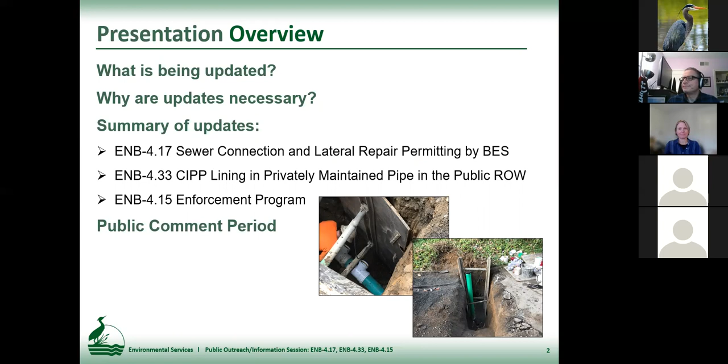So what is being updated? We're updating 3 existing administrative rules under the authority of BES. The first rule is what we refer to as ENB-4.17, regarding sewer connections and lateral repairs permitting by BES. These are policies and guidance for new sewer connections and repairs to existing sewer laterals in the public right-of-way. We're going to be talking about updates to Administrative Rule ENB-4.33, which is the use of cured-in-place piping, lining repairs in privately maintained pipe in the public right-of-way. This rule provides guidance and policies specific to CIPP repairs of private lines and laterals in the public right-of-way. And then we're going to touch on some targeted updates to ENB-4.15, which is our enforcement program rules.

Just a quick heads up that we're not talking about updates to city code. Where code provides the regulatory authority to do something, authorized by the city charter, we're talking about administrative rules here, which are intended to provide guidance, details, and decision-making criteria to facilitate the implementation of code. So as it relates to code, the rules we're going to talk about today, the authority comes from what we call City Code Chapter 1732, our public utilities code.

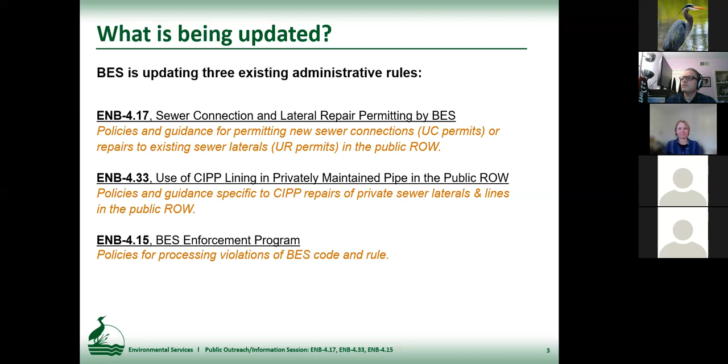So why are updates necessary? ENB-4.17 has been adopted and in place for several years, but it hasn't seen any major updates. So the updates will focus on removing obsolete information, updating references to applicable city design and construction standards, and overall clarifying policies and protocols regarding reviewing, issuing, and approving connection and repair permits, or UCUR permits.

ENB-4.33: these updates are primarily driven by the need to establish standards that will allow BES to consider CIPP products as alternatives to end seals. Just to be clear, we're not removing the requirement for end seals. They are still required, but the rule does need an update to allow BES to consider alternatives to end seals. Since the rule is being updated anyway, we're going to use this opportunity to provide clarity and guidance regarding the CIPP lining permit process and protocols.

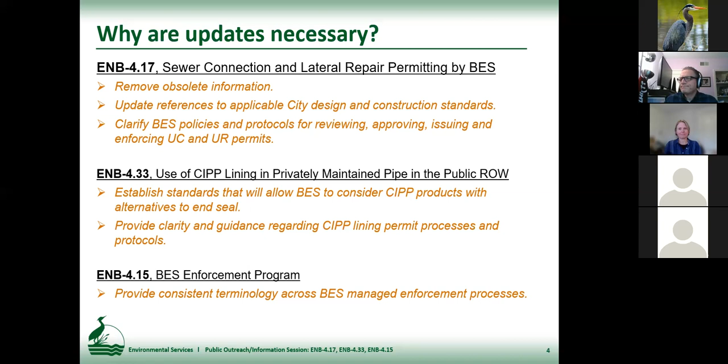And lastly, the enforcement program rules, ENB-4.15, just some targeted updates to provide consistent terminology to align the rule with some of the enforcement tools that BES's enforcement program uses. There's not a comprehensive update, it's more just targeted updates.

So to kick things off, we're going to summarize updates to ENB 4.17. Before we get going, I think it's important to note what's not changing. These updates do not add or create any new city policy, and the rules do not require permits for activities that are not already subject to this rule. So having said that, if you're familiar with the rule, when you look at the updated version, it's going to look and feel very different compared to the existing rule, but that's largely due to a comprehensive reorganization, which we're going to speak to later in the presentation.

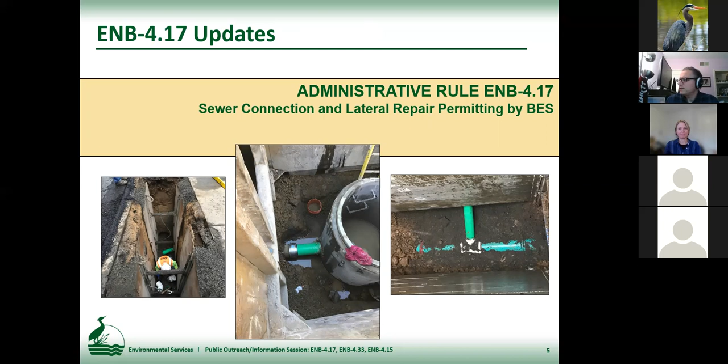So what is ENB 4.17? This is an existing administrative rule that provides policies, protocols, and guidance for permitting sewer connections and laterals in the public right-of-way. You can think of this as a mini manual specific to connecting and repairing laterals to the public sewer system. The permits associated with this rule include lateral connections, known as UC permits, and lateral repair permits, which we're calling UR permits. Just to be clear, this rule does not relate to public works permits, which involve much more complex activities such as public sewer main extensions and stormwater facilities. These are specifically rules that talk about lateral connections in the public right-of-way.

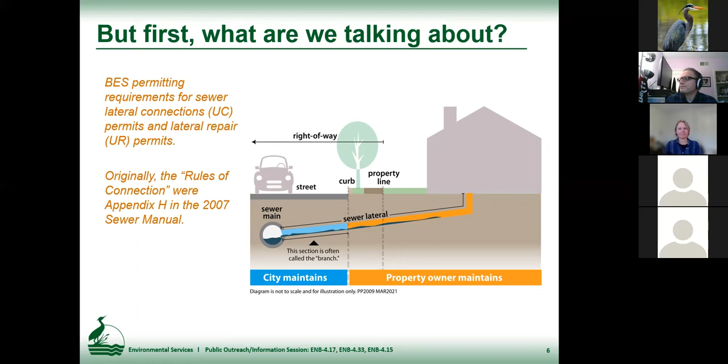Getting into 4.17, the overall theme of the update is to improve the rule's usability, transparency, and predictability. If you're familiar with the rule, it can be challenging to find information because all the information really is embedded in one of two long bulleted lists that don't follow any sequential ordering. So the updates address this by grouping related policies and listing them in chronological order that generally follows the overall construction and permitting processes.

One standout thing is the rule now includes a table of contents so you can find what you're looking for and hopefully find answers quickly to questions like, what type of activities trigger a UR permit versus a UC permit?

What kind of submittal requirements or qualifications are expected from the sewer contractor and such. Rule updates also remove a lot of outdated policy, which includes removing work that was never really permitted under or intended to be permitted under this rule, such as sewer extensions, work on private property which is subject to plumbing code, and decommissioning of septic, which is permitted by BDS and also requires some level of DEQ. Lastly, we're updating references to current city design and construction standards, such as the sewer drainage facilities design manual and the standard construction specifications.

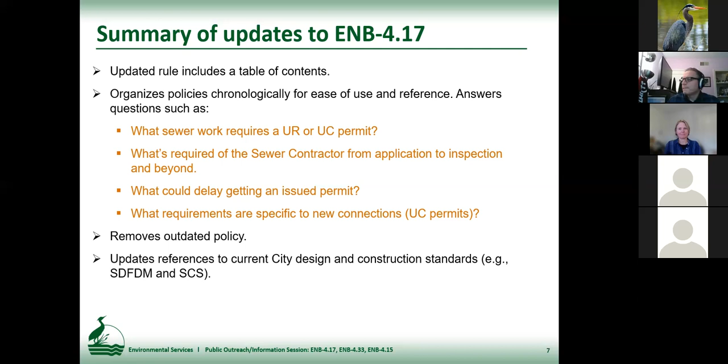The rule provides updates and clarification regarding activities and locations that are subject to UC and UR permits. So here's some examples of what activities trigger a utility connection permit.

We're connecting to a public sewer, connecting to an existing public branch, so that's one that takes it to the curb. The UC permit might involve just connecting the private side to the public side, this little segment here. Or if there isn't an existing branch, it would take it from the property line all the way to the public main.

UC permits are also issued to install cleanouts, City wyes. If you're relocating a line, they're issued for abandoning and capping laterals and installation of standard manholes.

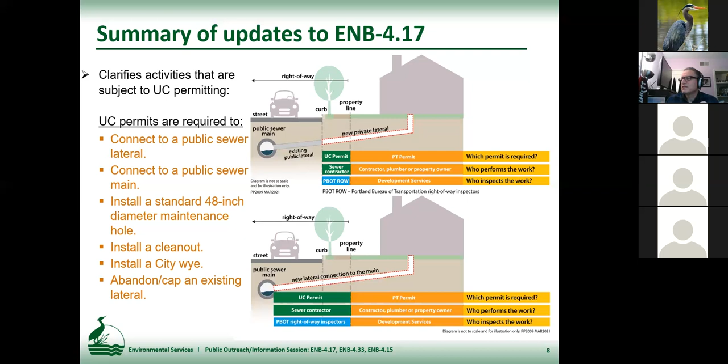Margaret, is there anything you want to add? Lynn, you did a fabulous job. Perfect. All right, cool, thanks.

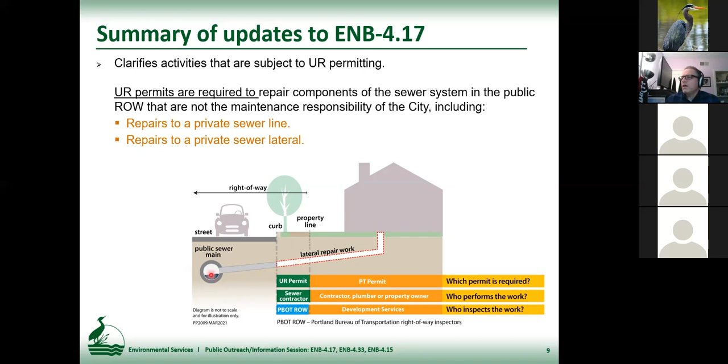I should back up one slide. What we're talking about here is the privately maintained portion of the public right of way. This is the area that's still within the right of way, but it's not the responsibility of the city, it's the responsibility of the property owner. Determining that can be difficult at times depending on the site conditions. So what the rule does is provide some guidelines to help determine those areas.

The city's maintenance area is described in chapter 17.32. We're not changing or altering any of the maintenance responsibilities reflected in code, we're just providing guidance on determining that privately maintained portion of the right of way.

To summarize, for paved roadways, which also includes alleys, we're talking about the face or edge of pavement to the property line. If there's more than one curb, like a public stormwater facility, then it's the face of curb that's closest to the property line. Unpaved streets, including unpaved alleys, this is the area from the property line to the edge of the 28-foot wide city maintenance area, centered in the public right of way. And for public sewer easements, we're talking about the area from the Y or T connection at the public sewer main to the edge of the public sewer easement.

I think I got that, but Mark, I just want to ask one more time, is there anything you want to add? Because this was a pretty good update here. Glenn, I have nothing to add. All right, then we'll move on.

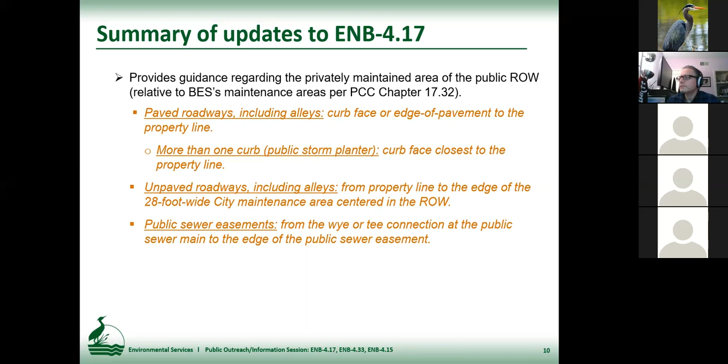The UCR permitting team really does strive to issue permits same day, but there are going to be situations or conditions that may cause a delay or withholding of the permit. That's not super clear in the rule, so the rule update is providing clarity and outlining some situations where BES may require a BOTMO.

Oh my gosh, Margaret, the Bureau of Maintenance? Bureau of Maintenance, Environmental Services Division of Maintenance Operations. Of PBOT.

You pick the acronym and we may require them to do the connection. Some of the situations include if it involves a clay pipe 15 inches or larger in diameter, mains that are 36 inches in diameter or larger, or brick mains. That could be a situation where we're going to request PBOT to do the connection.

And also the updates provide examples of conditions that may impact same day issuance. So if the sewer contractor is proposing a deep riser connection or inside drop, those can delay it because it might require the permitting team to check in with other teams, or in the case of an angled lateral, that might be subject to a design variance. Something that may withhold the permit for a while is resolving non-conforming sewer issues. So the rule updates just clarify existing expectations, since I don't think it was clear that permits would be issued same day. We're just making it clear that with some of these situations, you can expect it to take maybe a little longer, maybe not.

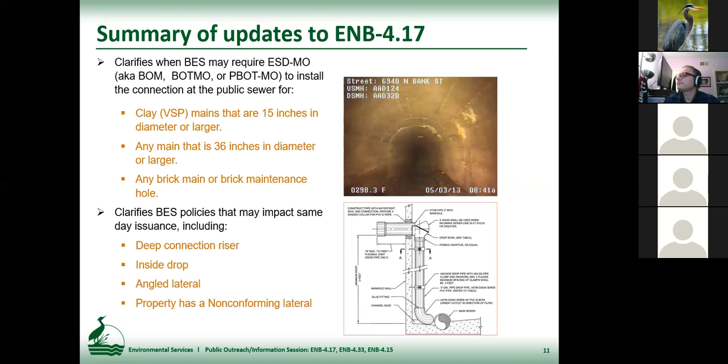The rule updates what is currently table 2 in the existing rule. It actually puts the information in the existing rule into a table format. It doesn't even have a format currently, it's just a bunch of information. It makes it really challenging to read and interpret, so we've cleaned that up.

The table now is just to clarify lateral to main connection types. This table really just expands and clarifies a similar table in the sewer design manual. That's all there is to say about that.

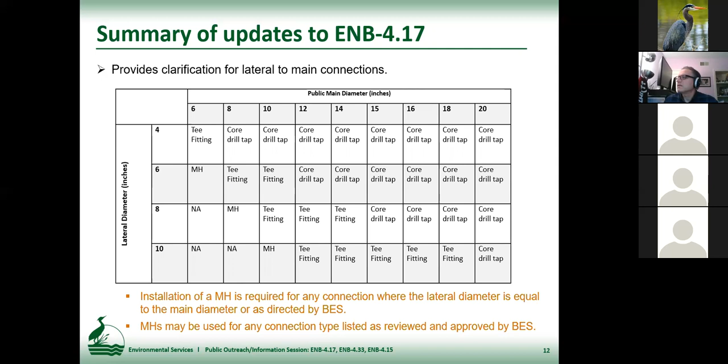The updated rule provides guidance on what to do when relocating and abandoning sewer lines. For private sewer laterals, you're going to be required to put in watertight plugs or caps on the face of curb—that's for sewer laterals on private sewer lines. Plugs and caps are going to be installed on the upstream and downstream ends of the private line.

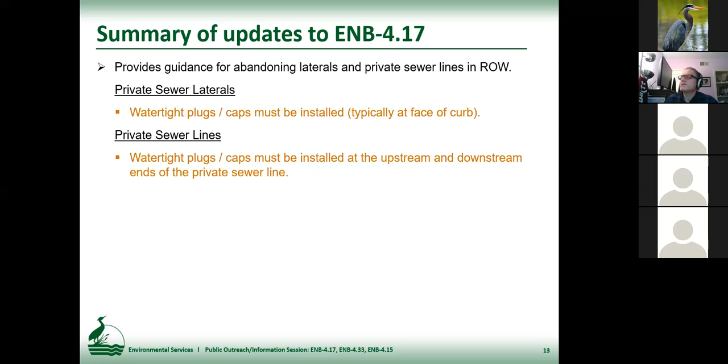So this guidance is new to the rule, but it reflects existing code requirements and construction standards and practices. It was added to the rule to provide clarity.

ENB-4.17 now includes a typical detail for installing storm and sanitary connections, and the intent of having this in the rule is really just to facilitate on-site conversations between the contractor and the inspectors. A picture says 1,000 words, and it's easier to point to a picture and describe what's going on than trying to describe it based on a condition in the rule.

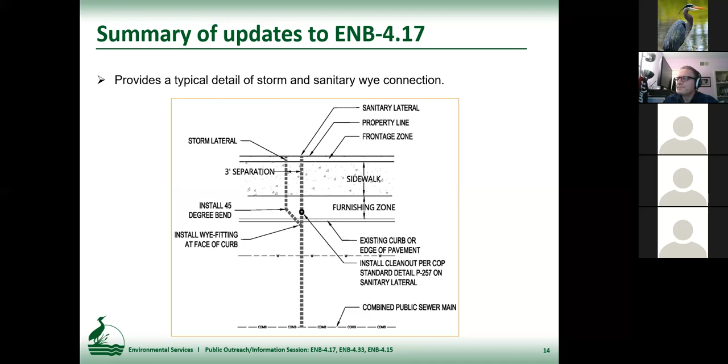And lastly, the rule updates make it clear that UC and UR permitting are subject to enforcement. This is not new—enforcement of UC and UR permits is and has always been authorized under Chapter 17.32 of City Code. It's just that the rule improves transparency regarding the types of actions that may cause enforcement, and those enforcements are conducted through our environmental compliance division.

And there's another rule we're going to be talking about later in the presentation that describes the procedures for enforcement, and that's ENB-4.15. Some examples of violations that might occur: failing to get a permit, failing to comply with the description of work—so going above and beyond what was authorized in the permit—not meeting conditions of the permit, and so forth. So with that, I'm going to switch gears now, and we're going to talk about our CIPP rule, which is Administrative Rule ENB-4.33.

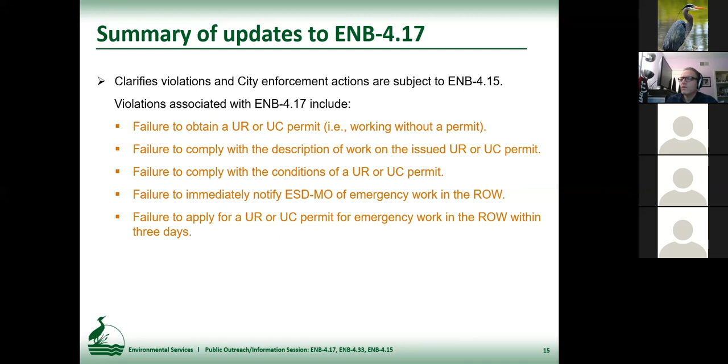ENB-4.33 is our cured in place pipe lining repairs for a privately maintained pipe in the public right of way, which might be the longest title of any admin rule we're going to talk about.

So before we get into it, like the previous rule we talked about, ENB-4.17, if you're familiar with rule 4.33, you'll notice that the look and feel of the rule is quite different than the existing one. That's largely due to just a comprehensive reorganization, trying to group related policies and put it in a sequential, logical order that makes sense for staff and for customers.

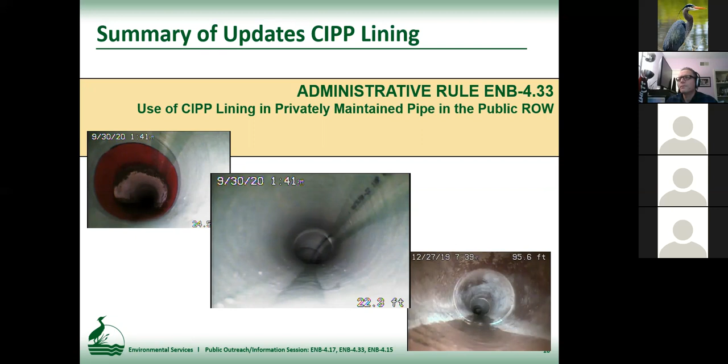So let's get to it here. I know I'm probably preaching to the choir, but for anyone not familiar with cured in place pipe lining repairs, this is a repair method that involves inserting a flexible liner into the existing failing pipe, or host pipe as we'll call it, and curing the liner to create a rigid, smooth surface that restores the old pipe to an almost new condition.

Administrative Rule ENB-4.33 provides the criteria, guidance, and protocols for using CIPP lining to repair privately maintained pipe in the public right of way.

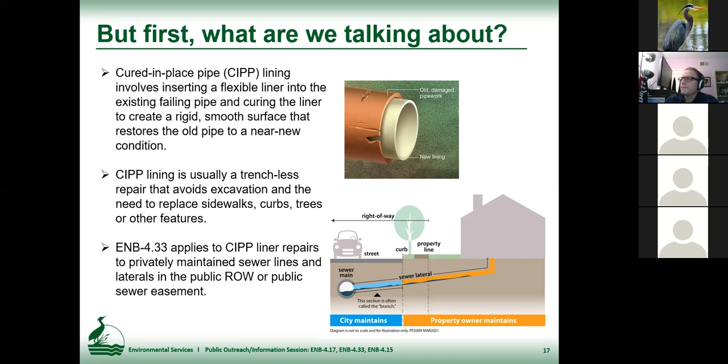This is the primary driver for the updates. I'll start by saying it's not the intent of the city to preclude the use of viable, effective, or equivalent materials. However, staff implementing this rule found the existing language for end seal requirements too restrictive, and that it didn't allow BES to consider equivalent alternatives. So that's the primary driver for this update, to reconcile an inequity regarding CIPP end seal requirements.

To address this, the updated rule now includes criteria that BES will use to review products that do not have or require end seals, basically alternatives to the end seal. Within the rule you'll find submittal requirements. It's suggested you provide as much information as you can, including methods of the liner system to expand and tightly conform to the host pipe, means and methods for product curing, and data for shrinkage and annular space development. That information has to demonstrate that the lining system can withstand an external hydrostatic pressure of 7.25 psi.

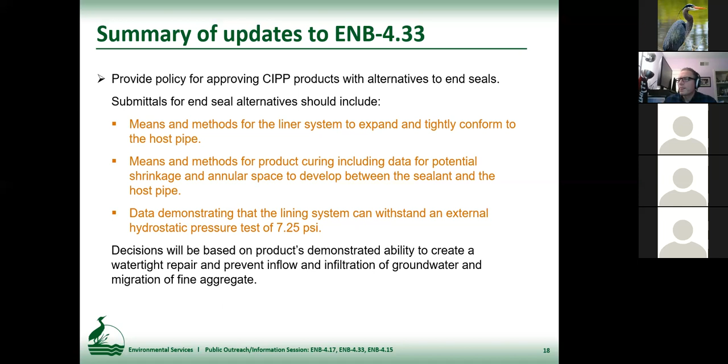That was driving the updates, to add this policy into it. Since the rule was open and being updated, we took the opportunity to clean it up, making it more user-friendly for customers and staff. That was accomplished by simplifying language to be more concise. There was a lot of redundancy in the rule, so we've done our best to remove that. We've also consolidated policies and guidance under related subject matter, since it was difficult to follow in the current rule.

Similar to 4.17, we organized this rule in a logical, chronological order that follows the construction and permitting processes, so you'll see parallels between the two rules and how they work together.

So this is in that same vein of clarifying, since the existing rule can be difficult to navigate and is often unclear as to what needs to be done, who is responsible for looking at it, and to what standards. We've tried to do that.

Basically, this rule is implemented by two different teams: BES standards and practices, and BES UC/UR permitting. They have different responsibilities, and the current rule isn't always clear as to who's doing what and when. So this rule has divided those responsibilities out.

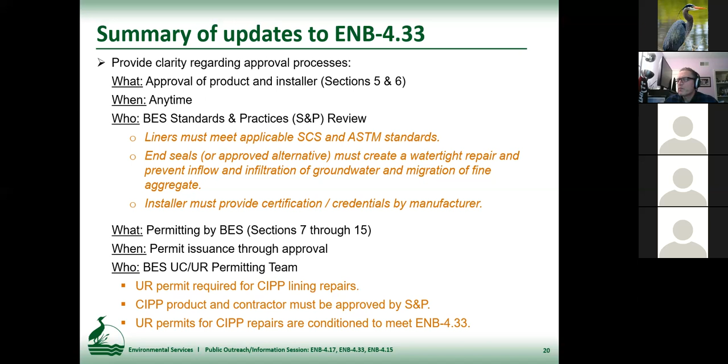Again, nothing really new here. The rule changes strive to provide clarity and predictability through better organization and more direct, less ambiguous language, and again remove redundancy. We've tried to organize the rule to lump all the related policies, so everything related to video requirements is section 10, liner locate is section 11, and so on.

It talks about after construction, these are the documents that you need to provide to Margaret's UC/UR permitting team, and then how they're going to look at that information and ultimately approve that UR permit. That's going to wrap up ENB-4.33. If you have questions, we'll address them at the end of the presentation, we'll have plenty of time to do that.

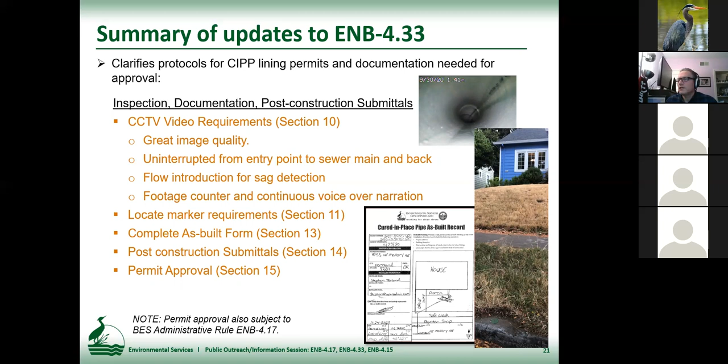The last rule we're going to talk about today is our enforcement rules, our administrative rules for our enforcement program. The primary driver for this update was to correct a minor oversight that inadvertently excluded ENB-4.17, which we talked about at the beginning, from the applicability section. The current rule has an applicability section listing all the rules subject to it, and that one was inadvertently left off, but it's always been enforced under this rule, ENB-4.15.

Since we needed to add that small change, we took the opportunity to make a couple of targeted updates, which are nowhere near the magnitude of the other two rules we talked about. These are simply strikeout underline changes in the rule. ENB-4.15 establishes the criteria BES uses for evaluating violations, assessing penalties, and describes the overall enforcement processes, including appeals.

There were very minor changes to this rule, just targeted revisions to update the applicability section. A definition was added for responsible party, and there were some minor text inconsistencies throughout the rule which have been cleaned up through this update. But the updates do not include any new policies, nor do they change, replace, or remove existing policies, just a couple targeted revisions.

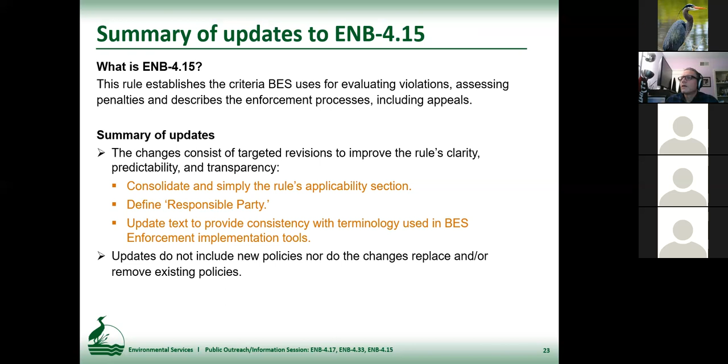Good job, Len. Yep, good job. I felt like I kept speeding up.